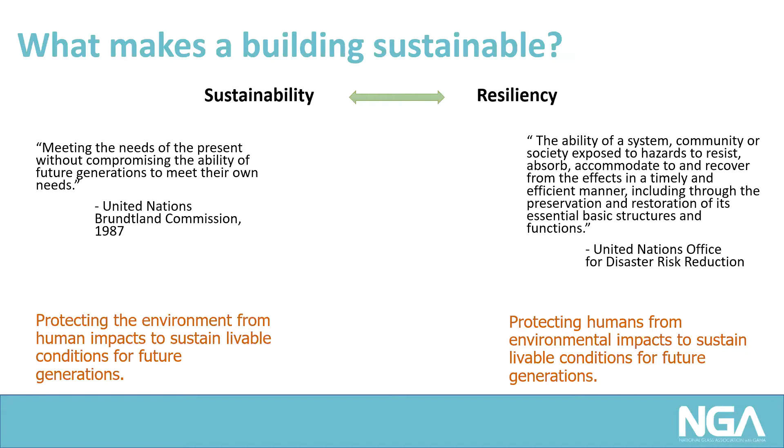So in black, you'll see the definitions from the United Nations on sustainability and resiliency, but I've put them into more simple terms. Sustainability is essentially just protecting the environment from human impacts. That's why when we talk sustainability, we're talking about reducing energy use and in turn reducing our carbon emissions or global warming potential. Alternatively, resiliency is protecting humans from environmental impacts, so potentially impacts that have already occurred and how it's changing the way we design. And so whenever we start talking sustainable design, I really think maybe we should start talking about designing for both and not necessarily just a sustainability mindset.

So how does what we do really impact sustainability and resiliency of our communities? Well, if you've attended any presentations on carbon impacts, I'm sure you've seen at least the top two statistics on here. But buildings account for almost 40% of global CO2 emissions. And from that, we can go on to say 80% of buildings that will exist in 2050 already exist today. So I'm going to pull the statistic from the last slide, and through rough analysis, we can assume that that means about 40% of the buildings that will exist in 2050 were built before the year 2000.

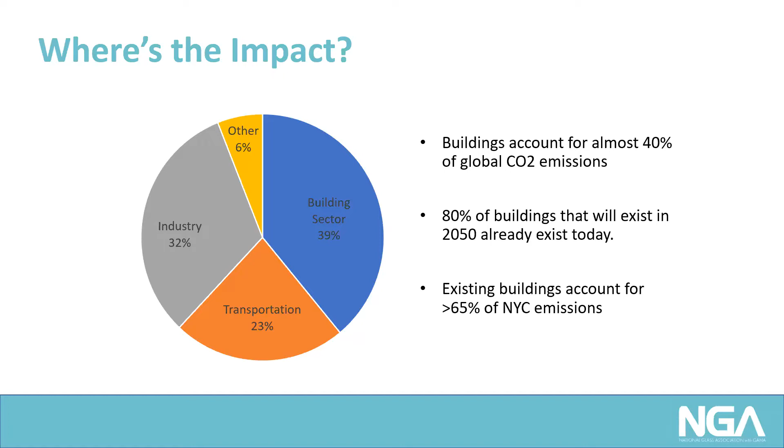So with all that, where do buildings come into play? Like, where do all the CO2 emissions in a building come from? Well, that can be broken up into two separate sections. It's embodied carbon and building operations. I did a lot of really deep diving research and now am an expert on bodybuilding, but not really. I did find a way to make this comparison though.

So we could think of embodied carbon as our bulking. Essentially, any new material you include on the project, any new mass you're introducing is increasing your embodied carbon of your building. If you're using an existing building, you already have the embodied carbon of your existing building there. So really, your introduction of new building materials is going to be pretty minimal as compared to a new construction. So the most efficient, the most environmentally friendly building is a building that already exists.

From that perspective, all of your design materials that you introduce really will impact your building operations, which is your cutting season. Really, what you're trying to do is introduce healthy building materials that will in turn create energy savings on your operations front. So building operations can be seen as cutting season. That's whenever you're really making all your savings and essentially seeing if the new materials you designed for are giving you the performance that you wanted. So we have to be mindful of what we're taking in with regard to our embodied carbon and how it affects our end results, which is our building operations.

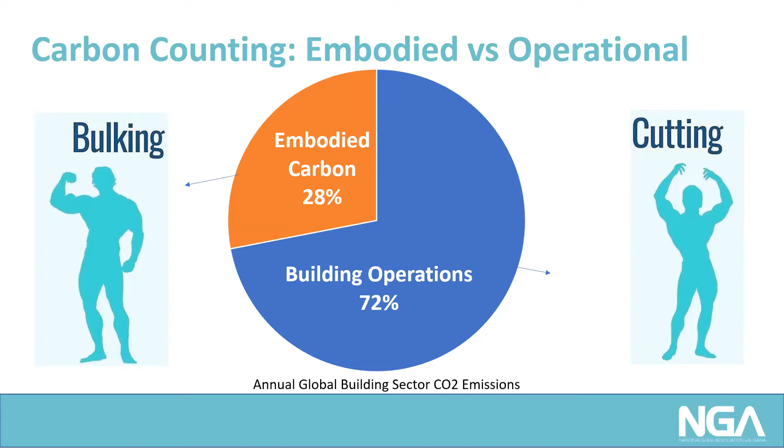So how do we design for clean or low embodied carbon? There's two different solutions. The first one is everyone's looking at EPDs, environmental product declarations. It tells you your global warming impact of a material, essentially based on the manufacturing process. So on the left, you'll see here, what it covers is your extraction of raw materials, the transport of those materials to your factory, and the actual energy and carbon it takes to manufacture that product.

It doesn't include transport to the site or construction of the building. It also doesn't include any recycling. It could include recycling prior, but usually doesn't. And so essentially your EPD is going to be covering what's circled in orange. And all of the gray portion there is going to be your operational performance. So you can look at a material's EPD and see what sort of environmental impact it's making.

And there are ways that manufacturers are looking to reduce the global warming potential or embodied carbon of their products. In the glass industry, some of these ways are introducing hydrogen or alternative fuels to fire the furnaces. We're also seeing a strive to use more recycled glass, or what we call cullet. As you start introducing more cullet into your batch, you require less energy to melt your raw materials, and you're able to produce glass with less energy and less carbon emissions.

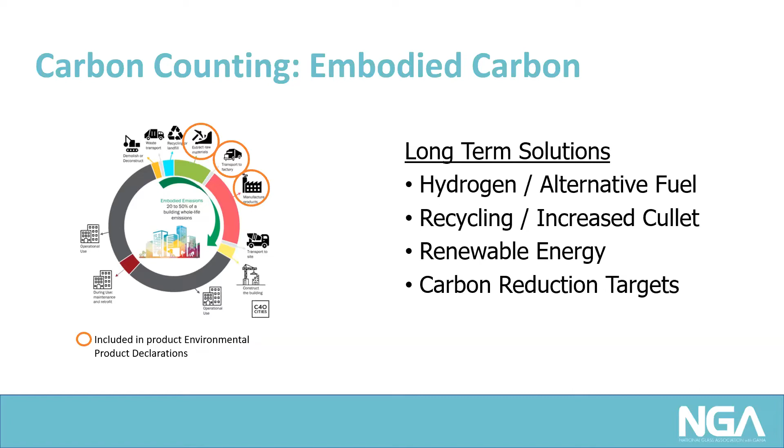So right now, the fastest way that we can impact our embodied carbon and our operational carbon is through our facade design. So like I said, embodied carbon is essentially the carbon emissions from all of your raw materials. Here's a nice example I like using of the watermelon. When you look at the way the watermelon is structured, the interior of it can be considered the structural elements. So that's your concrete, your steel, potentially mass timber. That's really where the largest mass and volume of new construction is. And so glass covers a large surface area similar to the rind of the watermelon, but it really is a small portion of the installed total mass or volume of the building material.

And so this is why we say the building that already exists is probably the most sustainable building, because you don't typically have to reintroduce all of these new structural elements. And the idea is to reduce the new materials that are being used. And like we said, we want to reduce the new materials being used, but we also want to make sure that you're able to get some sort of payback. And so we want to improve the operational performance with these new materials by allowing them to reduce the energy use.

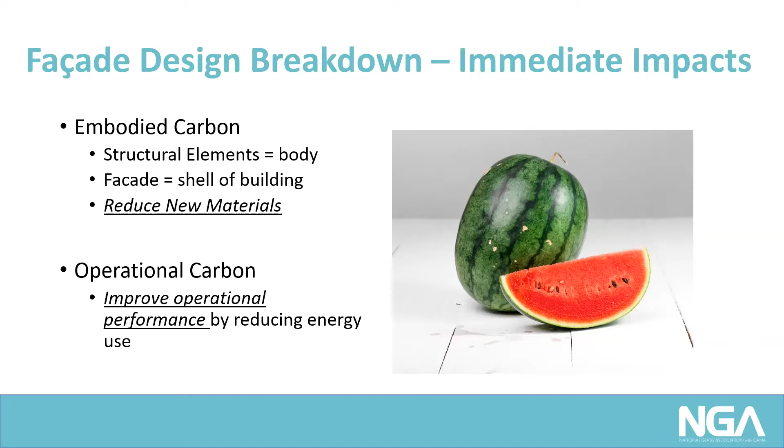So how do we do that with glass? Well, typically glass performance is broken down into these main three factors: your U-factor, your solar heat gain, and your visible light transmission. U-factor and solar heat gain are typically for thermal and solar comfort to improve occupant comfort, reduce your HVAC load requirements, and potentially improve building resiliency by improving the insulation of your design. And visible light transmission is more for aesthetics, so improving your quality of views. You can reduce your need for artificial lighting, which can reduce your energy load, and you can improve occupant health and productivity through high daylighting.

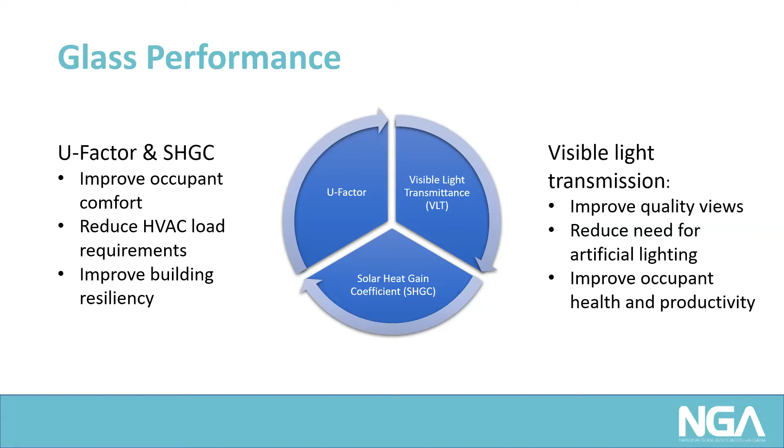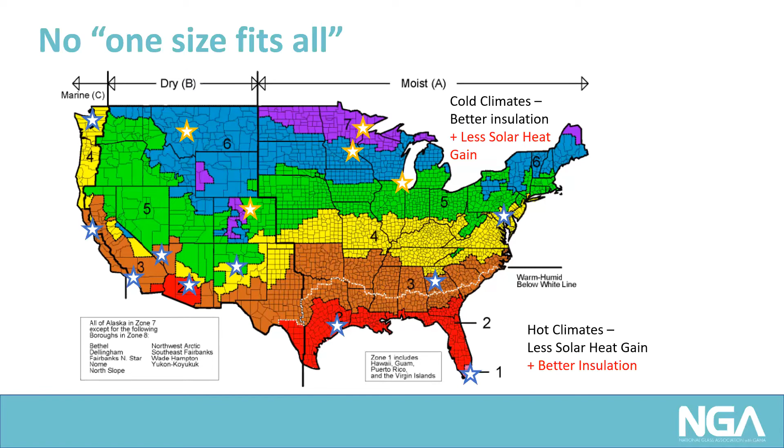But from what we saw earlier, designing for resiliency, that's not always the case today. There are some areas where we're starting to see significantly colder winters in the south and significantly hotter summers in the north. And so now we have to start thinking where we find that balance of solar heat gain and U-factor in sustainable design moving forward.

So strictly talking existing buildings, we want to think, what is the design approach that we should be using? And to steal the old reduce, reuse, recycle, I want to introduce reuse, reduce, rethink. So reuse existing building materials that you have, use existing buildings. Potentially, if you can use an existing sash, if you don't have to introduce new metal or structural elements, that would highly benefit your embodied carbon take. You also want to reduce the amount of new material, and you want to rethink what glazing can do, and we'll get further into that.

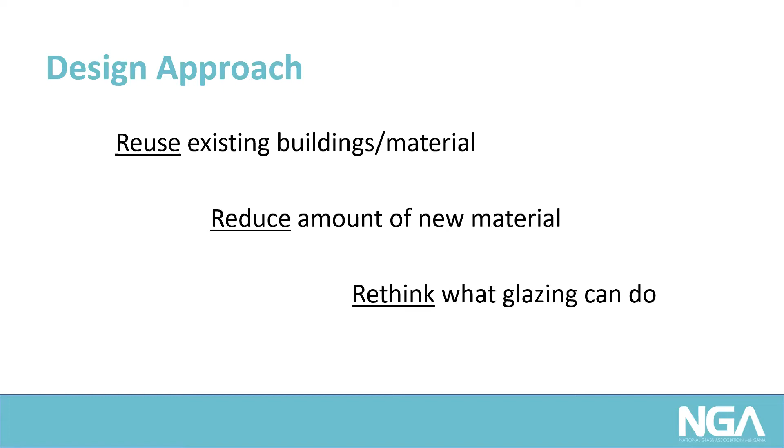So just to start with, through embodied carbon reduction, to reuse materials, one of the new materials that we're looking at is vacuum insulating glazing. This is a typically 6 to 10 millimeter glass that fits in existing monolithic sashes. So like I said, anything made prior to 1980 still likely has some monolithic glazing in it.

When you look at the embodied carbon breakdown of new windows, most of the embodied carbon contributions come from your framing elements. So if you're able to reuse your existing framing, you're significantly reducing the additional embodied carbon that you're introducing. There are trade-offs. So usually if it's a monolithic existing sash, you're not going to have those thermal breaks in there. Or it may be a material that's more conductive. But really, this is a project by project basis on how you should evaluate that.

But with regard to vacuum insulating glazing, what you're able to do is you're able to get a typical IGU performance, so a 1-inch IGU performance in a monolithic form factor. So you're not introducing additional weight, needing more reinforcement. You can reuse your existing sash, and you can maintain potential operability of your existing sash.

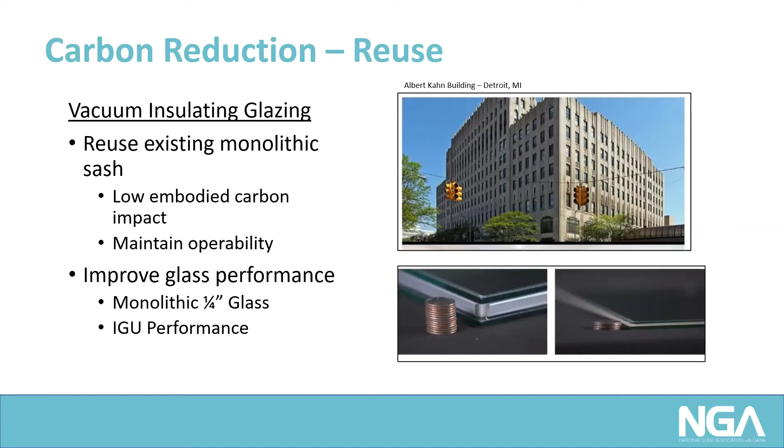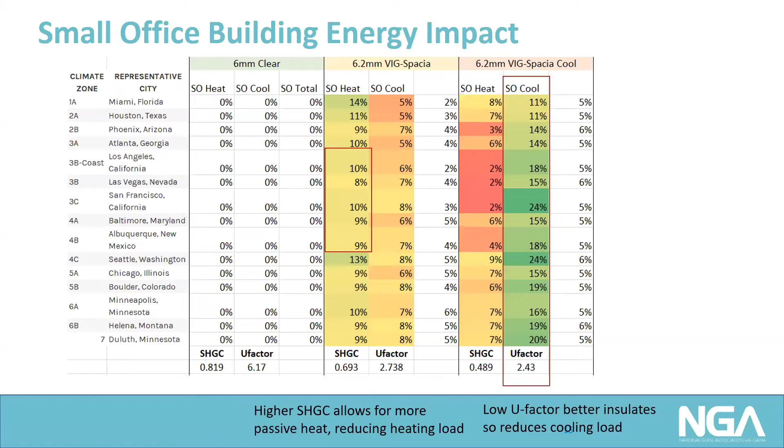And so using EnergyPlus and LBNL WINDOW, we did a quick small office building energy impact analysis across all of the climate zones that I showed before. In the first, you have just a typical 6 millimeter clear of what would be installed. And we introduced 2 different VIGs, one with a pyrolytic low-E in it, the other with a sputter low-E on surface 2. And you see, as you start improving your product performance, you're able to reduce your cooling loads and your heating loads, significantly improving the operational energy or operational carbon of your structure.

Another thing that we're seeing with regard to existing buildings is the addition of secondary window systems. Most people think, oh, it's just an interior or exterior storm window. A lot of people use just a sheet of clear monolithic glass, but now that we have thin solutions that have higher energy performance, you're able to use some of these high performance glazing solutions in addition to your existing glazing to reduce your operational carbon by improving either your U-factor, solar heat gain, or both. There are interior and exterior solutions. All lightweight, can be glazed on site.

One of the most popular buildings that has had this installed was the Empire State Building, and I believe it was Alpen High Performance Products that introduced an interior storm window on those. And so there are benefits with regards to energy performance, and you can quickly make up the embodied carbon from your energy savings. But the drawback is there is potential to lose operability if you are covering operable windows.

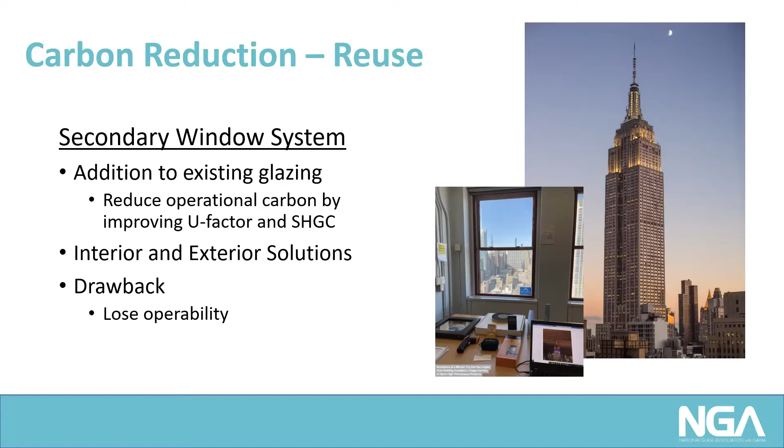So here's another similar small office building energy impact to show this. In the first column is our 6 millimeter clear monolithic. And as we move along, it's with the addition of a clear interior storm with a surface 3 low-E, and then an interior storm with a VIG. And so you'll see the significant savings that you're getting as you start to improve what you're using as your storm window. And by using lightweight or thin high performance materials as a storm, you significantly improve your building performance, and you're able to make up for that embodied carbon of these additions.

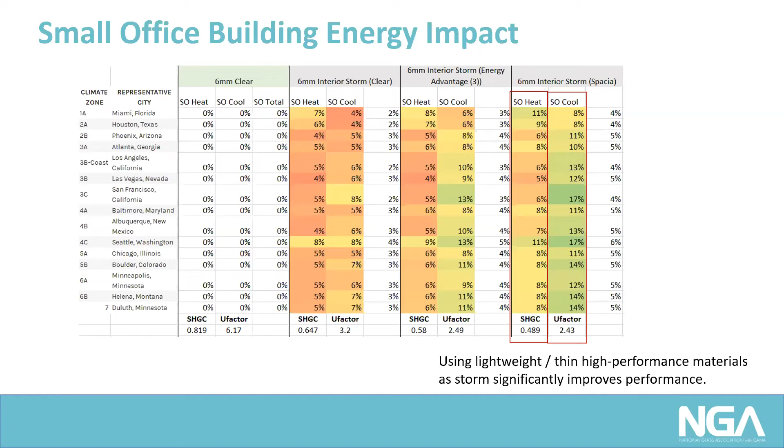Now, talking embodied carbon reduction, there are existing buildings that have IGUs right now. So replacing them with a monolithic form factor wouldn't really make sense. But you still want to make the improvements. And so one thing we can do now is with the adoption of the thin triple IGU. It's the same form factor as a typical double IGU, but it now has a thin center lite. So you can improve your operational performance.

And the thin center lite reduces your embodied carbon impacts. One, because it can fit in a standard double IGU system with a reduced weight when compared to a traditional triple. And with the way embodied carbon is calculated, the thinner your glass is, the less embodied carbon your material has.

And so we know triples have been introduced for a while now, but you can see on this bottom chart that predominantly what we're using is our double low-E IGUs, and triples really haven't taken off. This is residential, but I think it's safe to assume that our other markets are very similar. So it's just something to consider whenever you're looking at renovating an existing double IGU sash.

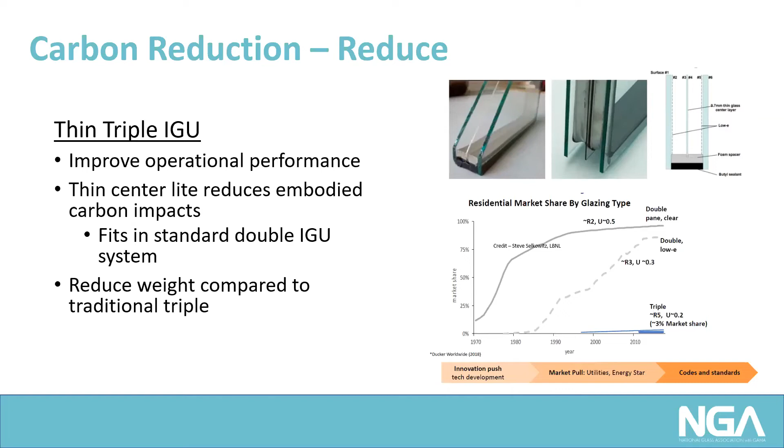And lastly is the carbon reduction, rethinking what glass can do. So with the introduction of transparent photovoltaics, I borrowed this image from Ubiquitous Energy, but the idea is that now instead of it just being a passive insulation and essentially weather barrier for your building, you can have a dynamic window area that's actively producing energy and improving your embodied energy payback for a net zero building performance. And so essentially now, rather than only dealing with your rooftop, you can have a vertical solar farm.

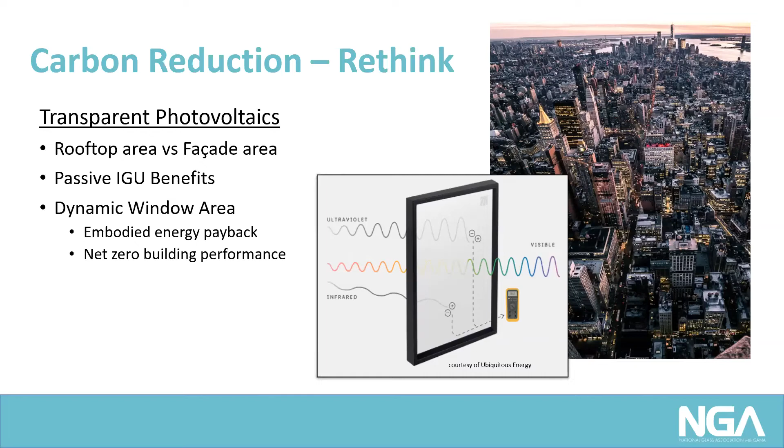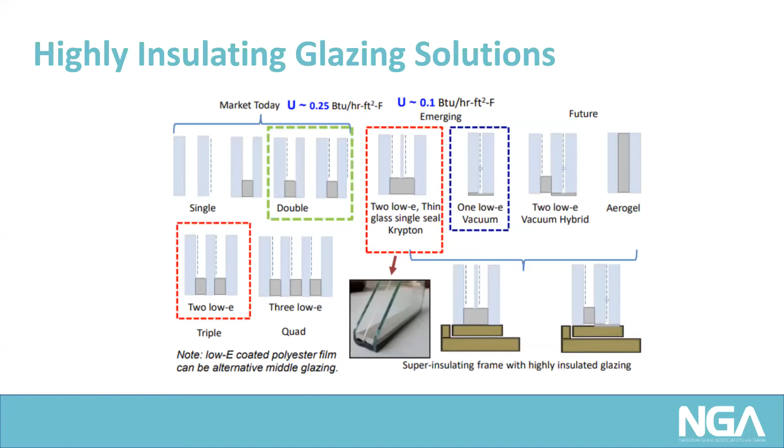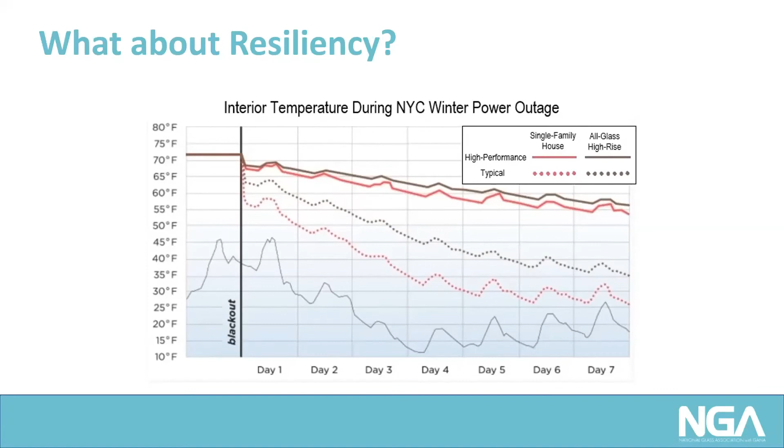And so with that, the big takeaway is for existing buildings, we want to minimize additional embodied carbon impacts by using existing buildings, and also really take the time to improve our operational performance, because by improving our envelope, we allow for resiliency, we allow for operational energy reductions, potentially leading to smaller HVAC systems or less reliance on your HVAC system in general.

But in new construction, there's a wide variety of available technologies. Really, the sky's the limit on that. So what we want to take into consideration is designing for the future and making sure that whatever your design is, you're able to get your operational savings to have a fast turnaround and make up for whatever embodied carbon you put in initially.